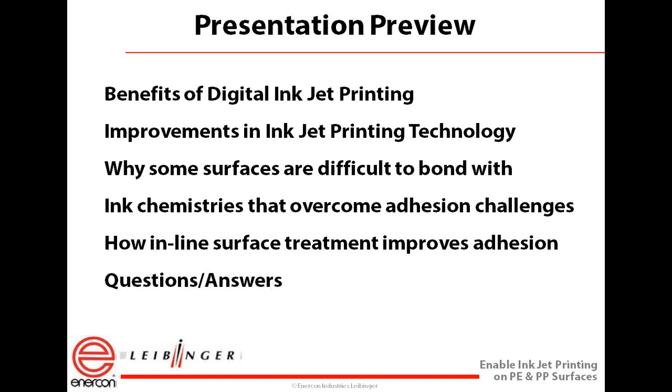Let's begin with a summary of the information that will be provided in today's webinar. Our panelists will cover the benefits of digital inkjet printing, from digital flexibility to equipment improvements, including sealed nozzle technology. They'll cover why some surfaces are difficult to bond with, ink chemistries that can overcome adhesion challenges, including a review of diverse industry applications. We'll look at how inline surface treatment improves adhesion and how companies are using surface treatment to improve quality and output. And we'll wrap up with a question-answer session at the conclusion of the webinar.

To get things started, I'd like to hand it over to Jim Miller, who will bring us up to date on the benefits of today's inkjet printing technologies.

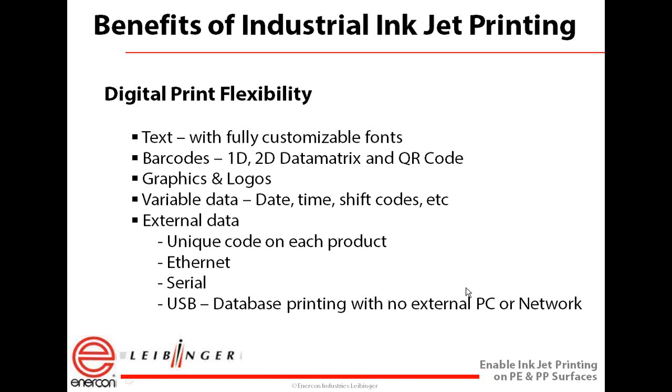At Leibinger, we use our sealed nozzle technology, which makes the use of inkjet very easy. It's ready when needed. This is something that has always been a bit of an issue with continuous inkjet printers - their reliability, how easy they are to restart after long-term shutdowns, how easy they are to operate. Our systems use a true Windows CE interface for very simple operation from the standalone touchscreen or to integrate into a network.

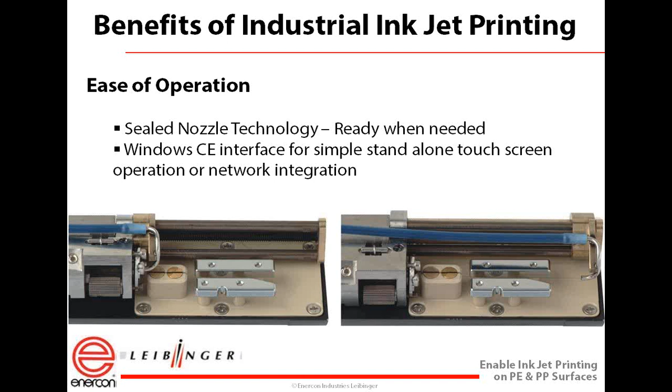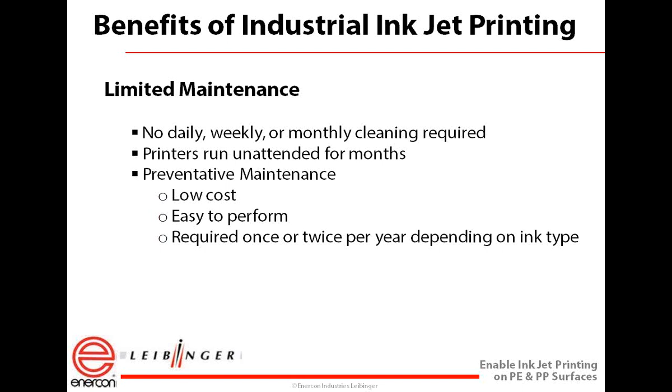We've also built systems that have limited maintenance requirements. There's really no daily, weekly, or monthly service or intervention or cleaning required, which is, again, something unusual in the world of inkjet printers. The printers will run unattended for many months as long as the install and operation is done correctly. And our preventative maintenance is very easy - it's low cost, no modules to replace, easy to perform, and only required once or twice each year depending on the ink type that you're using.

Again, we've built our machines with economy of use in mind, and the biggest cost savings is in the reduction in downtime on your production line. The hydraulic design is also very efficient for low solvent consumption, low consumption of inks depending on nozzle types that are chosen, and we even have some options to further reduce the solvent consumption with our EcoSolv.

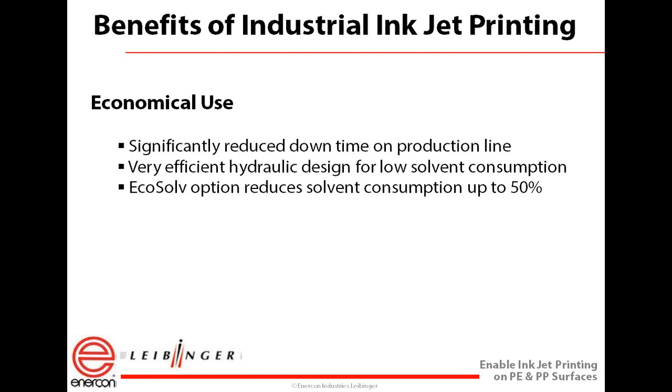All right, thanks, Jim. Ryan will now cover why some surfaces are difficult to bond with.

This could be anything from dust on the material after it's been extruded or molded, that it's sat around for a while. You could have additives in your plastic which migrate to the surface. This can and sometimes is a surprising challenge to folks that they find. Also, inherently, there are a limited number of bonding sites for your ink to adhere. When you combine all these components, what you end up with is a surface that tends to be hydrophobic.

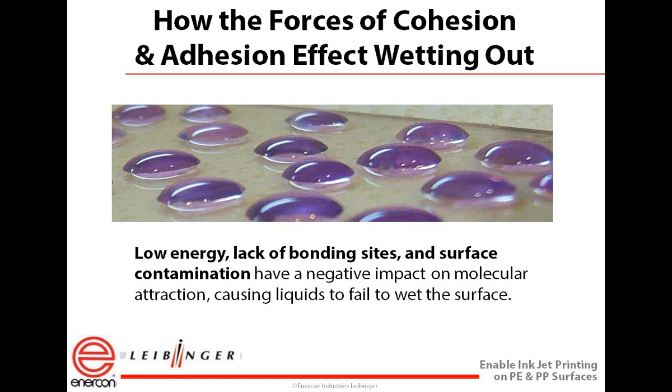As we talk about adhesion, it's important to note that low surface energy, a lack of bonding sites, and surface contamination all have a negative impact on adhesion of ink, and ultimately they fail to wet out to the surface. What you're seeing in this image is just that happening: droplets of ink are staying on top of the plastic surface, and they're not wetting out, which ultimately will lead to inadequate print adhesion.

The force of cohesion is the force of something trying to stay together. The force of adhesion is two things trying to stick together. Without proper surface treatment, without proper surface energy, with certain ink combinations, what you get is the force of cohesion being greater than the force of adhesion, ultimately leading to improper ink adhesion.

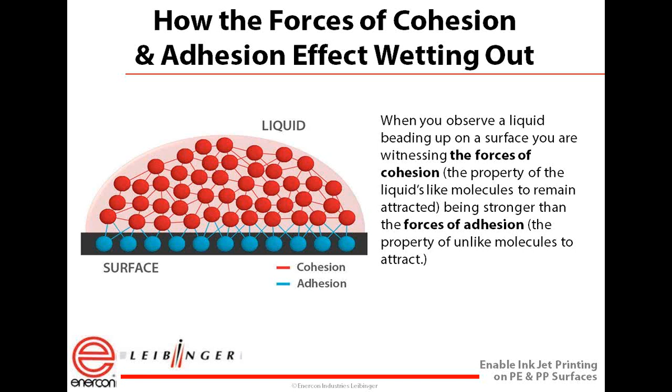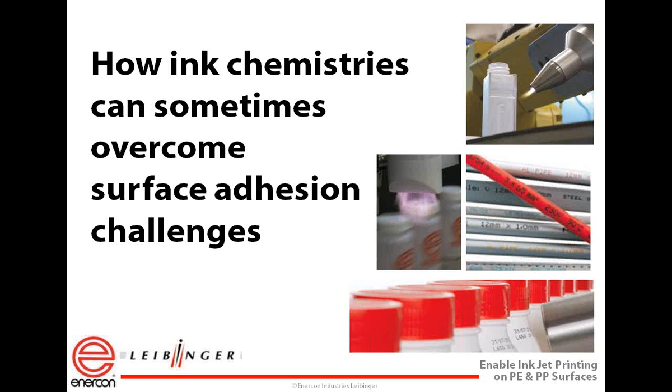All right, thank you, Ryan. Jim, can you talk a little bit about how ink chemistries can sometimes overcome these surface adhesion challenges?

Sure, Mark. There are quite a few materials that inks have been developed for that will provide satisfactory adhesion of the ink. In some of these cases: wire and cable, pipe and tubing, electronics, automotive parts. For many of these cases, we have inks that are available that will work satisfactorily.

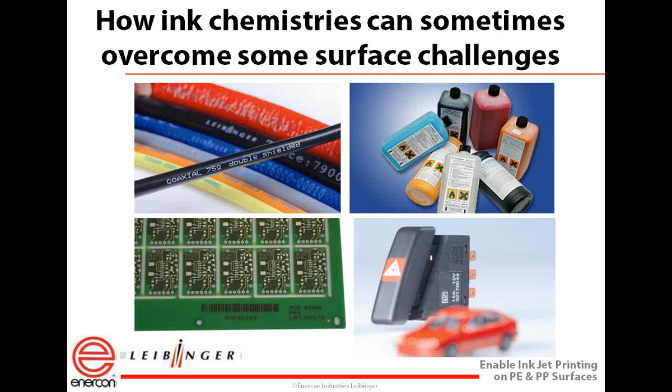There are also instances in these same industries where we don't have inks that really perform to what typically are your expectations. But some of the industries where we do have inks that do extremely well, and some specialty inks, is food canning. We have fade-resistant inks through the retort process.

Also inks that are thermochromic, in that they print black, and once they go through the process, they turn red or blue to indicate that that process was completed. Again, that ink is specifically formulated to adhere to that can and make it through the entire process.

Extruded cable, pipes and tubes, PVC - we have inks formulated that adhere very well and also resist the transfer when coiled, which is an issue we can have with PVC materials. Again, HDPE, PE, and polypropylene typically are very difficult to find any type of ink that is really acceptable. We have some that are better than others, but we'll talk more about what the surface treating can do for that.

We have chemical resistant inks, inks that are resistant to isopropyl alcohol. We also have one specific ink, certified by Boeing, that is Skydrol resistant, which is one of the tougher chemicals to be resistant to.

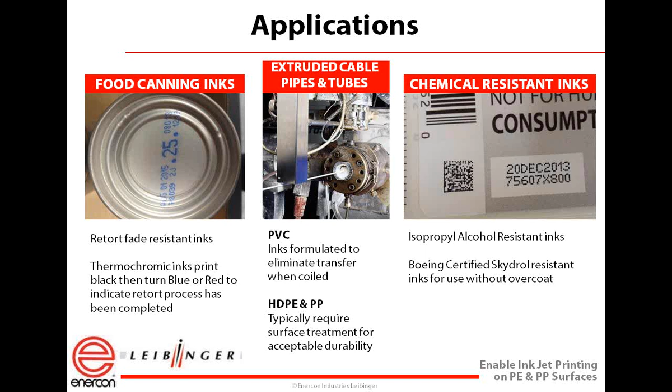Again, some other unique applications where inks are developed specifically to adhere and work properly: we have edible, FDA food grade inks for printing onto food products or onto pills, pharmaceuticals, and so forth. We also have a special white pigmented ink for printing directly onto silicon rubber that performs very well.

Security inks are getting to be more popular for many industries to track information on products. We have orange and magenta that print clear and fluoresce under UV light.

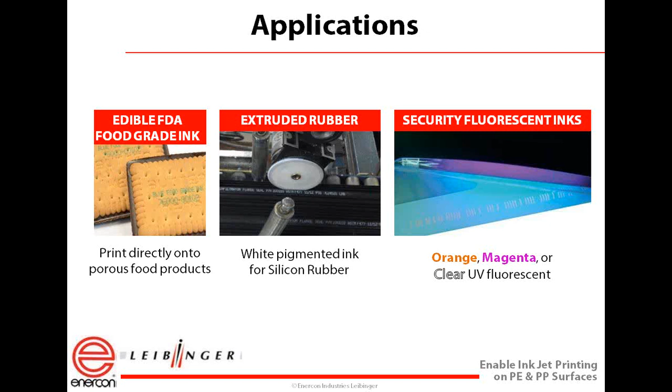These ink types that we use in the printers typically have 3 different bases. MEK is by far the most popular and the most economical, typically. We have straight ethanol-based inks, slower drying, with lower adhesion properties, typically on plastics.

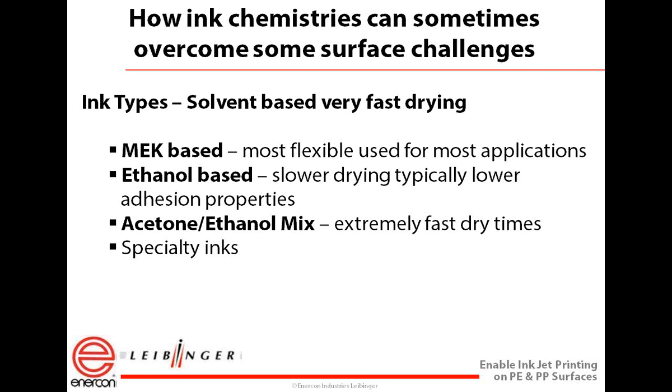And then we have an acetone ethanol mix, which is getting considerably more popular. These have very low VOC content, but still have very fast dry times. And then there are specialty inks that are specifically formulated for very unique applications.

Within these ink bases, we further break down how inks are categorized: whether they're a dye-based ink, which has a large number of formulations but provides very low contrast, typically on dark materials. We have soft pigmented inks, which give better contrast and run in a standard inkjet printer. And then we have the pigmented or heavy pigmented high contrast inks, which give very good contrast on dark materials.

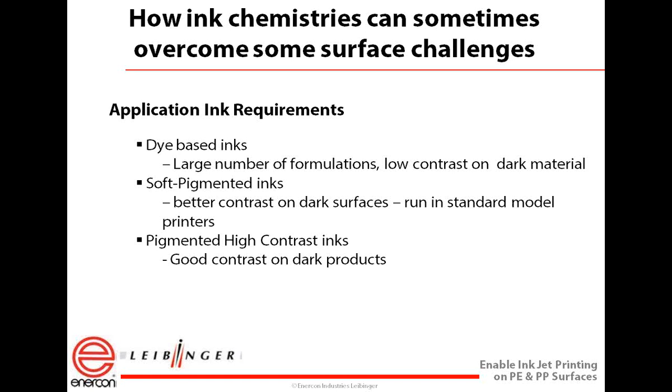Again, some of the specialty inks and applications that we have - inks that typically don't require treating: PVC no-transfer inks. We do have a UV cured ink that makes the ink very chemically resistant, but that doesn't necessarily mean it will adhere better to the material. So in that case, it may need UV curing and surface treatment.

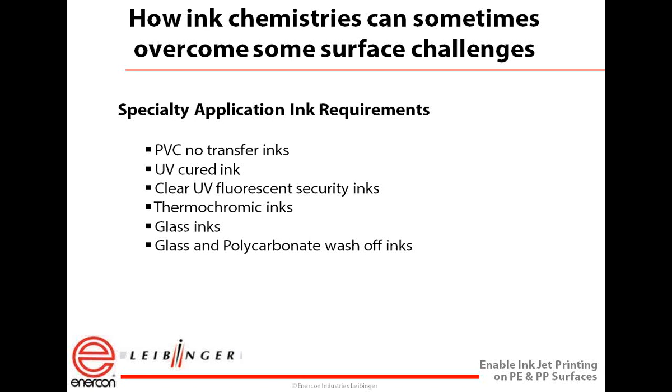There are clear UV fluorescent security inks, thermochromic inks, and special inks specifically for glass. And then we have some people who actually want the ink to wash off, which is the opposite of why we're here today. They want to print the ink and then have it wash off, either in a process or in some parts with returnable bottles and water bottles and so forth.

Thanks, Jim. Ryan, can you talk about how inline surface treatment enables ink adhesion on some of these more difficult surfaces?

Yeah Mark, we talked earlier about adhesion impediments. So a quick review: most plastics, particularly polyethylenes and polypropylenes, have a low surface energy. You can often find contamination on the surface, and additives can migrate to the surface and limit the bonding sites. All of those pieces can lead to adhesion impediments.

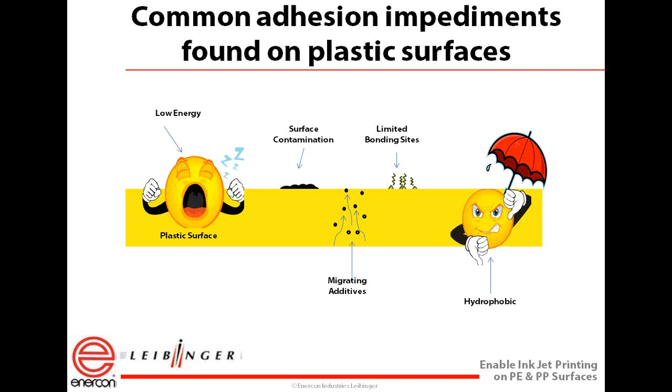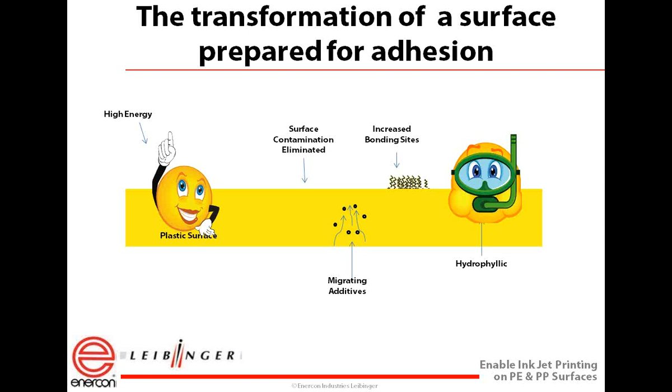So as we go through and transform a surface by surface treating or plasma treating, essentially what we're looking to do is create a high energy surface. We eliminate or minimize contamination on the surface. Those additives that migrate to the surface, we're able to remove, and we're also able to increase the number of bonding sites. All of these things contribute to turn a surface that was hydrophobic into one that is hydrophilic and will ultimately better accept the ink that you're laying down.

So I mentioned a little bit about surface treating or plasma treating. Oftentimes we'll get the question, what is plasma? Simply explained, plasma is an ionized gas. In most applications we look at, particularly in printing, we're typically ionizing air. Those charged ions and energetic electrons, generally being in equilibrium, we generate by ionizing the air around it. There are some applications which are a bit more difficult to treat, where we may blend in a chemical mixture of gas to help promote adhesion.

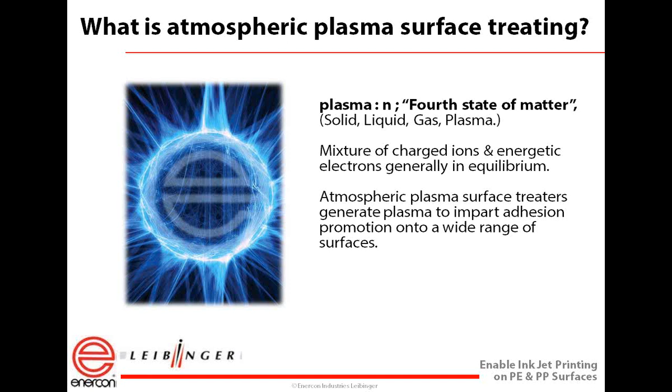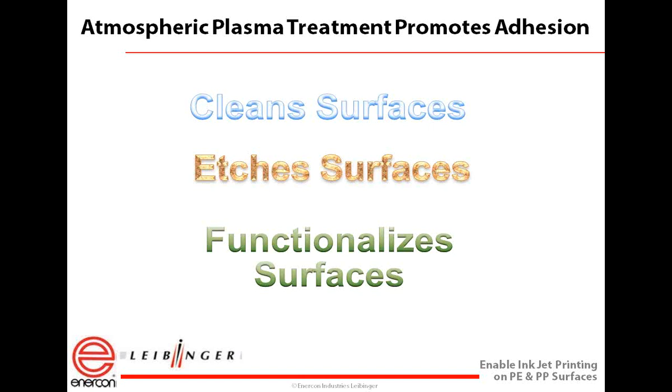So plasma treating is going to remove both organic and inorganic materials from the surface. We talked about etching, and really what we're talking about is a micro etching. It's not something you're going to be able to see with the naked eye. Our goal is not to modify the surface in a way that takes away from the look and feel of your product. But in micro etching we're creating more bonding sites for the ink to adhere to. Finally, we're also going to functionalize the surface by increasing the number of polar groups on the surface, ultimately leading to better ink adhesion.

So what you see on this slide are two of our technologies for enhancing surface energy. The picture on the left shows what we call our blown arc discharge, and this is particularly set for some applications. We're generating this arc in about a 2.5 inch or maybe a little bit wider treatment area, so we're able to get a fairly wide area of product to allow you to print on it. Typically this technology is used in a little bit slower applications, typically inline, running about 30 feet per minute.

On the right side, we're looking at what we call our blown ion technology. Instead of generating that big purple arc like you see on the left on the outside, we're generating it on the inside here. Through compressed air, blowing the ions out, that will clean the surface, functionalize, and etch the surface itself. These are used typically at about a half inch width on the treatment areas, can go a little bit higher or narrower, but that's typically where we're looking. It's used in high-speed applications, and can be used on both conductive and non-conductive materials.

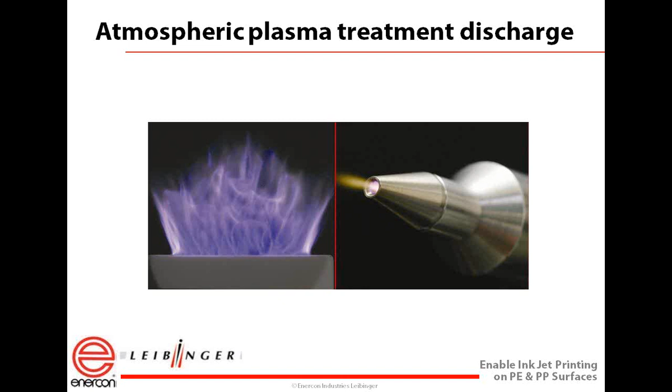So what do we see? How do we measure results, how do we measure success? One way we can look at is dyne levels. Dyne levels will typically give us a pretty good indication of where a material starts and where it goes after treatment. Dyne levels don't always translate into acceptable ink adhesion, but they're usually a pretty good indicator. On polyethylenes, you typically start somewhere in the 32 to 34 range, and we increase those to 42 to 60. Polypropylenes could start a little bit lower, still 30 to 34 dynes, ending up 45 to 60. Once you cross that threshold of 40 to 42, you're typically going to see pretty strong ink adhesion in applications.

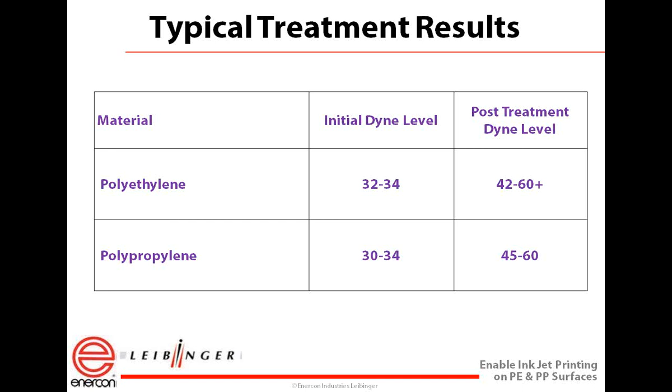You're going to see results before and after. The top image is untreated—an ink droplet laid down on a plastic surface tends to bead up, much like water on a freshly waxed car. It beads up and doesn't adhere to the surface. The second image shows that ink droplet flattening out, or wetting out, which is typically a good indicator of acceptable ink adhesion.

The bottom picture illustrates this with more droplets. On the upper right side, you see droplets that aren't wetting out. The bottom side is treated, and you see that ink lying flat across the surface.

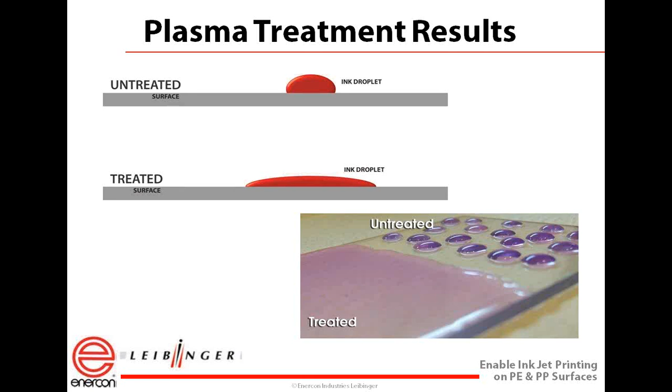Jim talked about how there are times when you don't need surface treatment, and there are inks that will work. But when should you consider surface treating? If you're seeing unacceptable ink adhesion—maybe it's scratching off, or failing a tape test or whatever durability test you're using—that's when you want to start thinking about surface treating. If you're getting inconsistent ink adhesion, that's another good indicator. Or generally, if you just want to improve the quality or output of your systems, all good reasons to consider surface treatment in your process.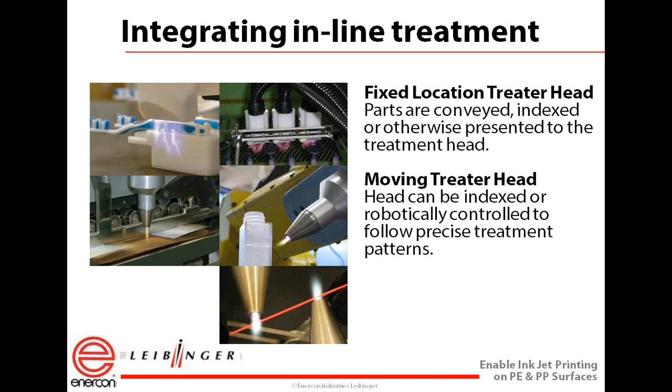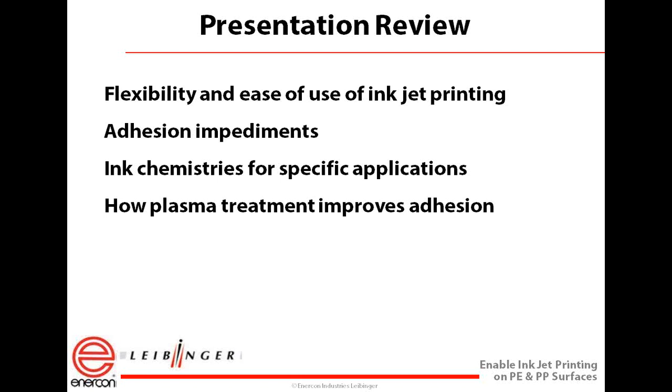To recap, we looked at the flexibility inkjet technology can offer through digital printing. We've seen new improvements to inkjet printers that are low maintenance and easier to operate than ever before. We took a look at adhesion impediments, specifically polyethylenes and polypropylenes and how they are often difficult to bond with. We reviewed ink chemistries used for specific applications. And we talked about how plasma treatment can improve adhesion—both where ink isn't adhering at all, and where it's not adhering durably enough—as well as improving overall product quality by enabling adhesion and wettability of all types of inks.